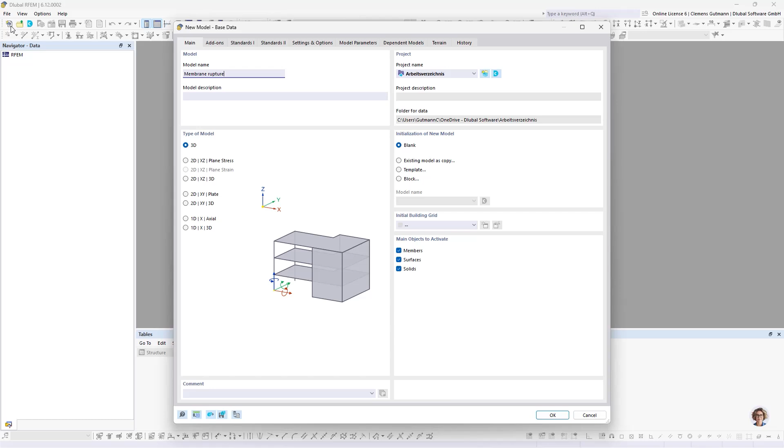Okay, so let's jump into RFEM and create a new model for the first case. I'm going to call that membrane rupture. For this I don't need solids, but I need the construction stages add-on because we are looking at different states of the model, as well as the form finding add-on for the initial form finding.

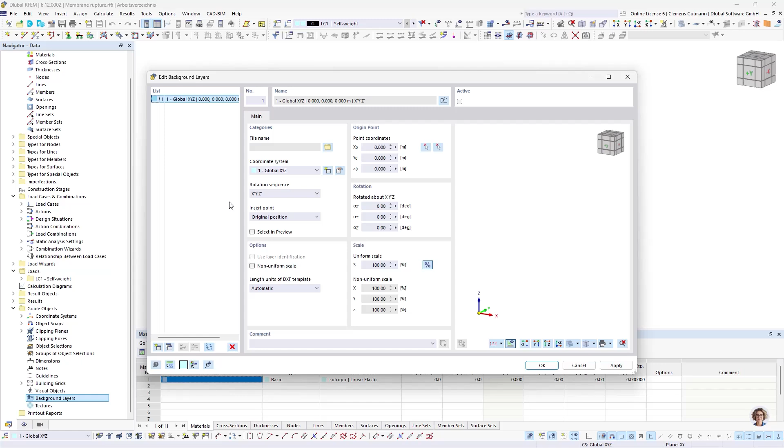I have the base geometry in a DXF file, so I'm going to import this into my model. This membrane structure is located between two buildings. We can see the surrounding walls on the left and on the right, and in between there's a road, something like that, and this membrane is covering that space.

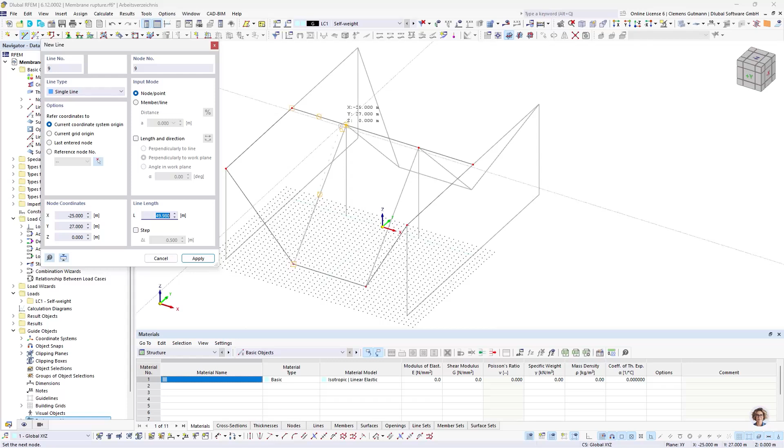Okay, so let's start with creating the lines, and then surfaces. For this project I'm using a PES-PVC type 3 fabric. Our stiffness type is, of course, membrane. Then we can select the boundary lines, and the other surfaces will be of type quadrangle.

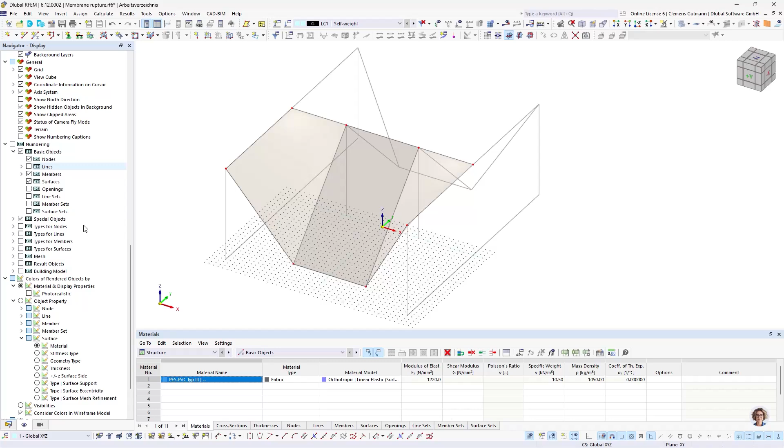It's always good to inspect the orientation of the surfaces. This can be easily achieved by going to the display navigator and scrolling down to the section for colors of rendered objects, where you can choose the surface side being displayed - one side is blue, the other one is red. I want them to be oriented in the same way, which I can do by right-clicking on that surface and reversing the local axis system.

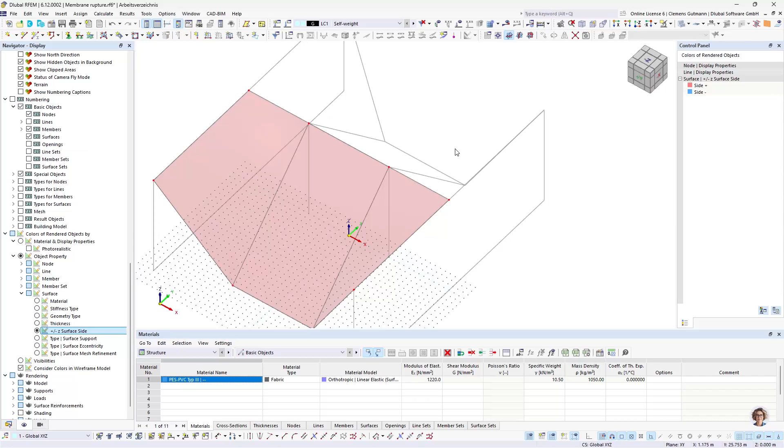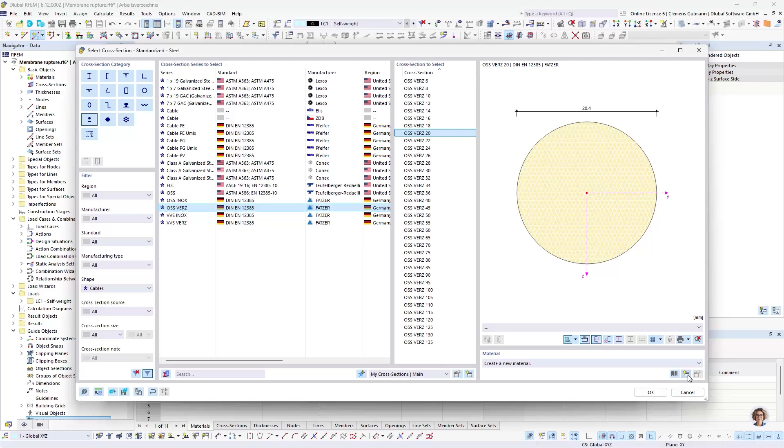Next thing we're going to model are the cables. So we have some cables here in this model, and for this I'm going to use a material from a German company, and I need a new material from the same company.

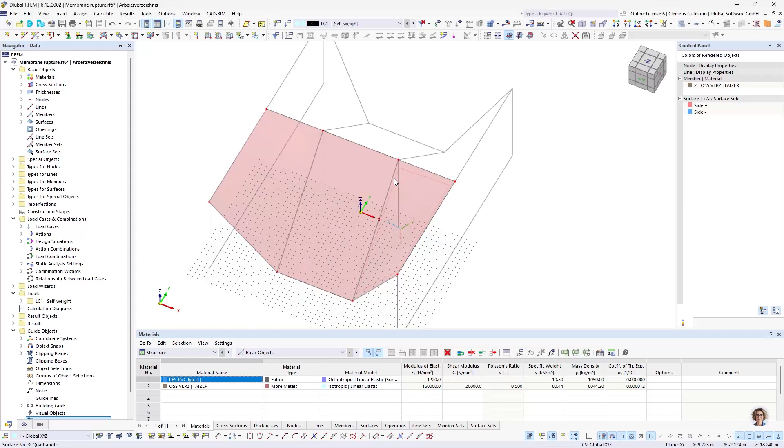So one of the cables will be here, and the other one's here. Good, so that's the cables, and then we have some pylons, and these pylons are made of a hollow cross-section.

Here. This one. And then we need a new material for them. Okay.

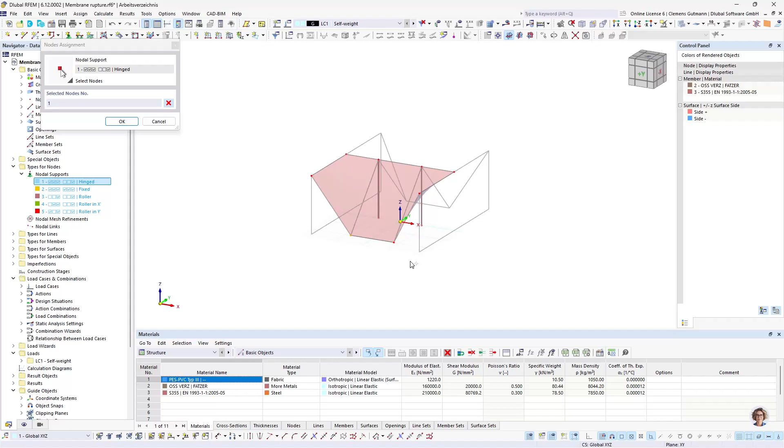Then we can proceed with the nodal supports. So we have two on each side, and the ends of the cables will be supported like this, here and here. And then we have fixed support for the pylons.

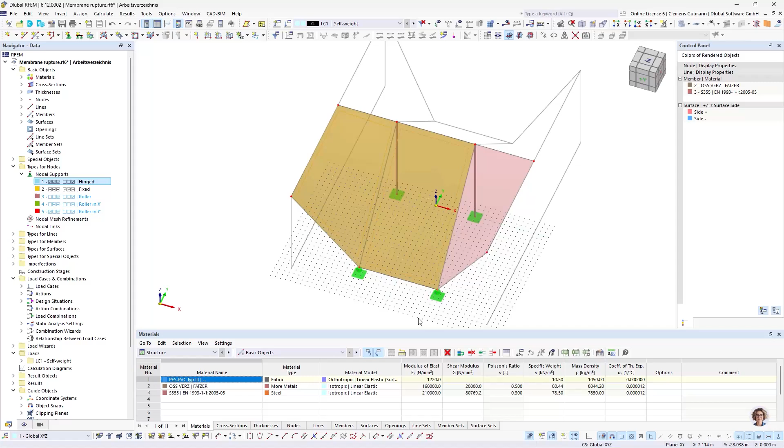Okay, that looks good. And then, of course, we're going to copy this to the other side. Copy. Okay, oh, forgot. Copy. Yeah.

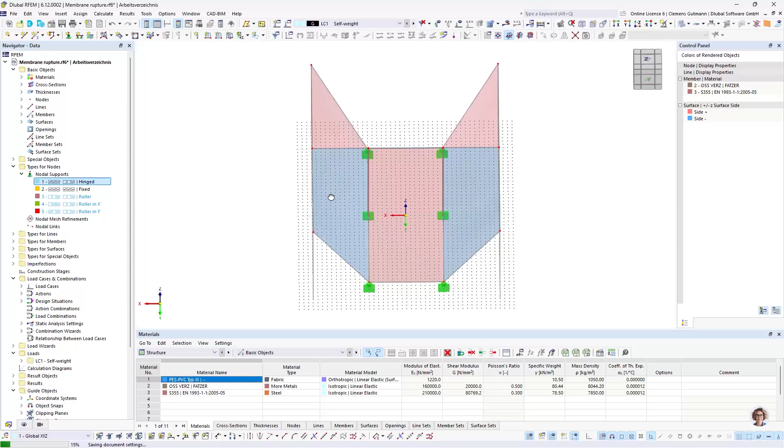All right. Then we have two more. We have to flip the local axis system. And then, last but not least, we have some line supports at the top of the walls. All right. Here. Here. Okay.

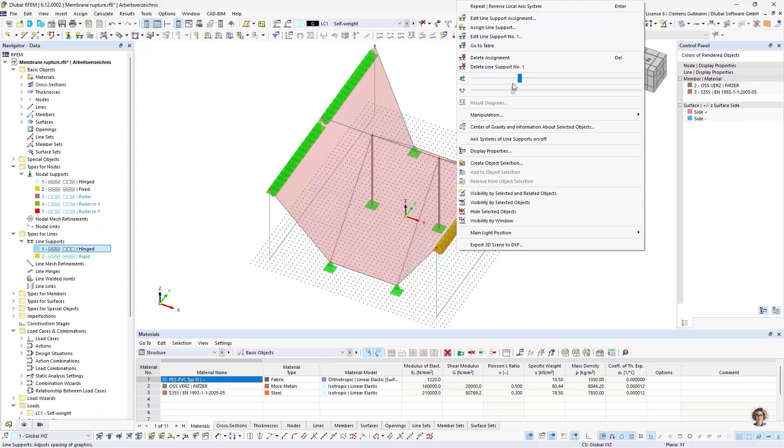Then let's take a look at the different stages that we're going to analyze. For this, we're going to the construction stages section. There we have, the construction stages have two parts: one part is about the topology, the geometry, the objects, and the second part is about the loads.

So here in this first step, we're going to take a look at the topology and the objects, and we have a start, and this will be the form finding. Then we have a second one, this will be the membrane rupture, and the third one, where we are going to look at applying securing measurements, and the last part will be removing membrane panel. So yeah, we have these 4 stages.

Of course, you can have a lot more stages. You can have whatever combination you like. You can have different variants. So you can choose for any stage which is the previous stage. So if you want to analyze different variants, you can have one start and then different variants, or you can have two or three starts. You're completely flexible with this add-on. It's very versatile what you can do with it.

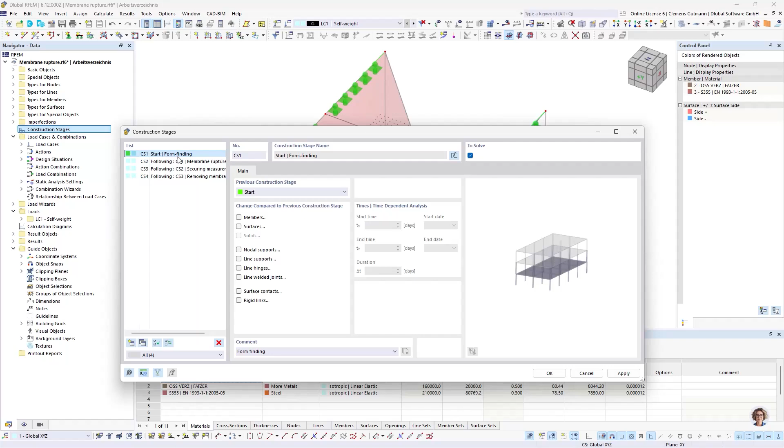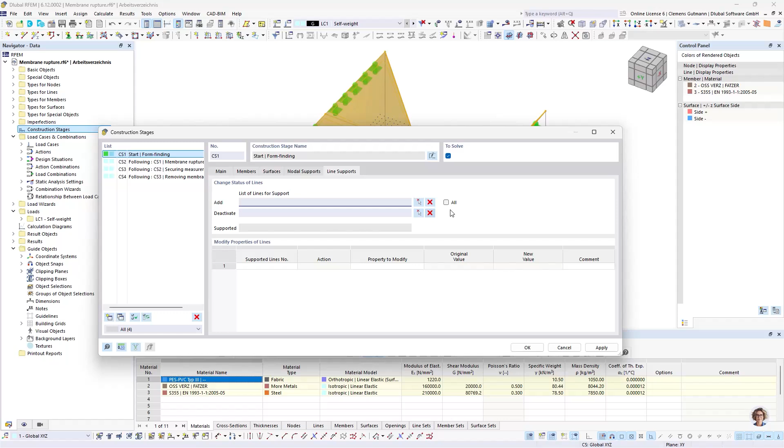So let's talk about which elements we are going to have. So in the start, in the beginning, we're going to have all of the members, and then we're also having all of the surfaces, as well as all of the nodal supports and all of the line supports. So this is our first stage.

Then it comes to the membrane rupture. Then, of course, we didn't model it. So how are we going to do this? There are, of course, several approaches, depending on your model, which geometry you have, to think about how you can represent this. I'm going to do it in one way, but of course, you can think of a different way depending on your needs.

One important thing to notice here is that currently it is not possible to interact with the form found shape if the form found shape is created within RFEM. So you do the form finding and you have a mesh that is used for that, for the calculation. And then you get a result. And you cannot interact with this result and, for example, say, okay, I want to rip that calculation mesh open.

So you have to do this beforehand. In our case, I'm going to do this by creating a small intermediate surface that will be there for the form finding, but then removed in the subsequent construction stage.

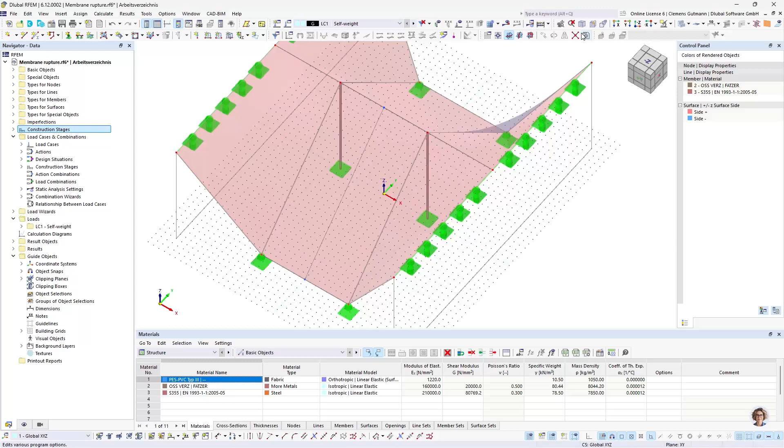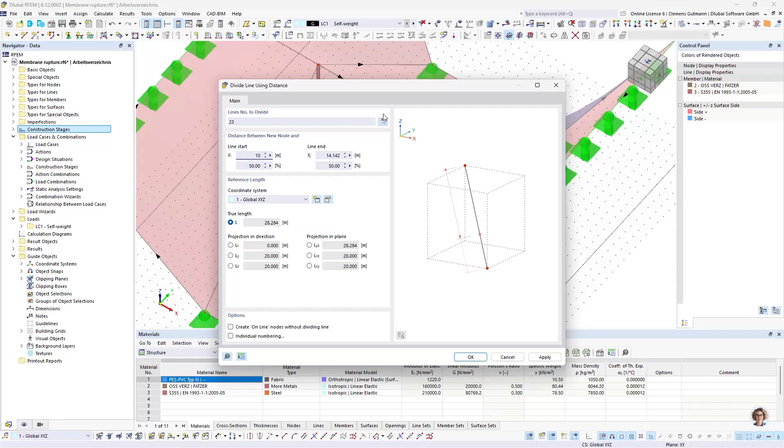So I'm going to draw a line here, and I'm going to connect this line so I get a proper connection here, and this bottom and top line is divided. And then in our case, our panels will be 10 meters long. So what I am doing is I'm going to divide that line at a certain distance, in our case 10 meters from the start. Apply, and then again 5 meters in the middle of that line again. I'm going to move this node by a little bit, let's say 1 centimeter.

And then mirror this about the YZ axis. And now we have this little space here.

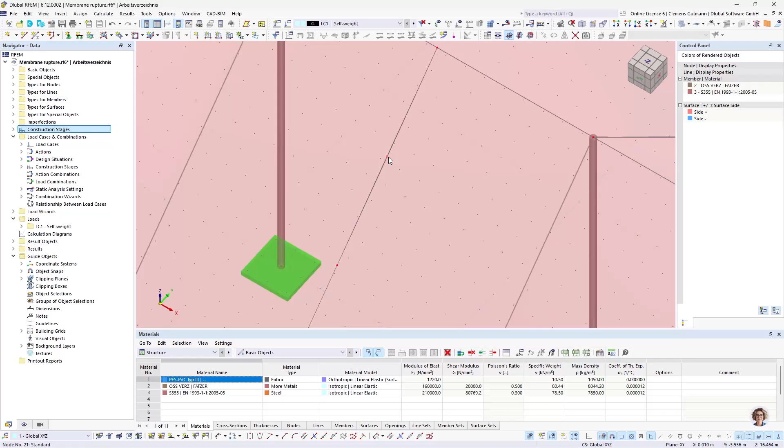I'm going to divide the surface, with intersecting lines, all intersecting lines. This creates 3 surfaces, 2 big ones, and then this very small one that will be covering the rupture in the beginning. Then, for the later analysis, I also want to remove the top panel that is broken, so I am dividing the surface again.

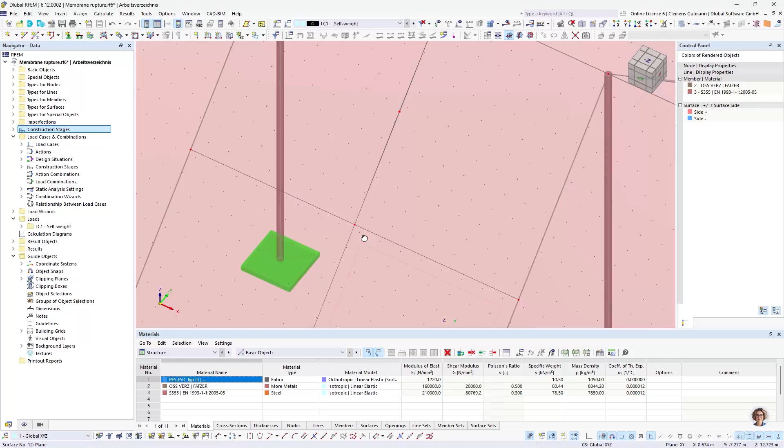Good. Next thing is we are looking at a very delicate analysis here. It's very complicated because we have a very sharp rupture. Maybe again this as a background.

So why is this rupture defined as 10 meters long? Of course this length will change during the form finding, but this is something we have to do like this. You can work around that if you do the form finding not in this model, but import a form-found structure. Then you can work with that structure, but in our case we have to make assumptions for the length beforehand, before the form finding.

And what we don't see is how the panels are actually placed on this membrane. For this project, I imagine that there is a weld here at this line and also at this line, and the weld has roughly double the thickness of the membrane, and therefore is a lot stiffer. It's not very likely that the weld itself will rip. So we assume that this rupture, which is a dynamic process, will stop at the weld and maybe run along the weld, but it won't cross it. This is an assumption that I make here.

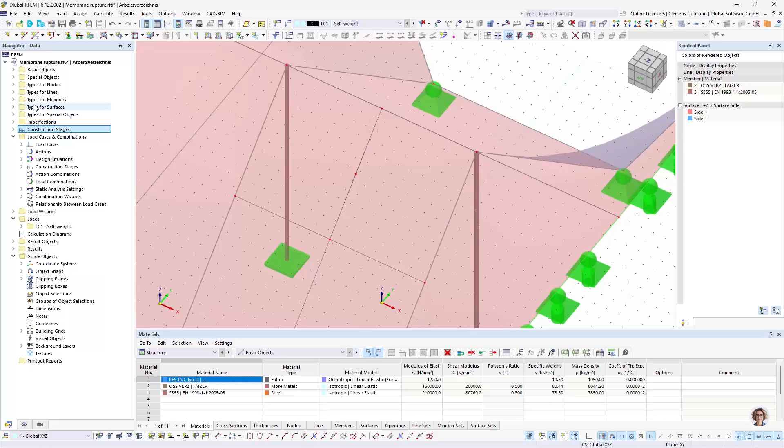So nonetheless, we need some mesh refinement here, and I'm going to apply a mesh refinement of 5 centimeters to these lines.

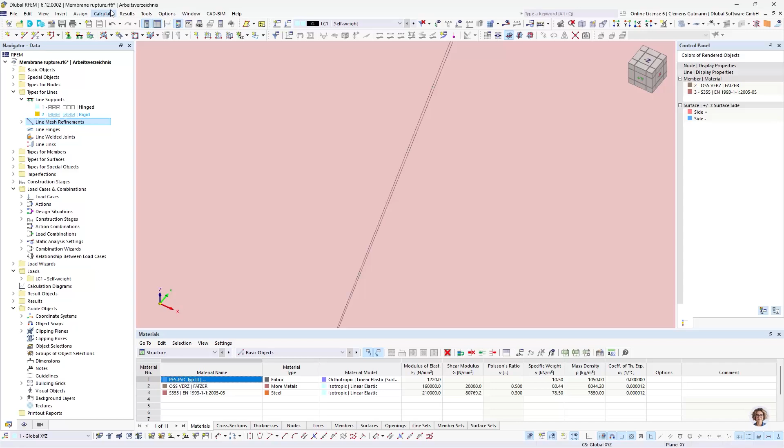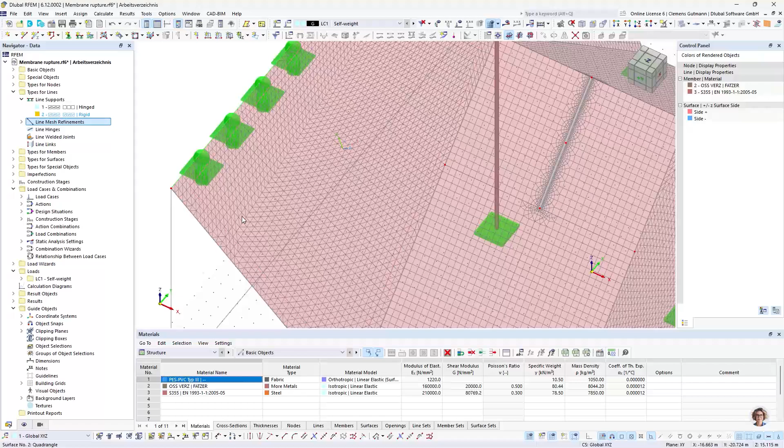Okay, and then we're going to have the issue that this is very, very small in the beginning, and by default the meshes of membranes are triangles, also for plane surfaces. I'm going to deactivate this to help improve the mesh in this case. We can see for the quadrangle surfaces they are automatically turned into triangles because it is a curved geometry from the start.

Okay, let's proceed with the loading. So the first load will be the form finding loads. I'm going to deactivate the self-weight for this analysis.

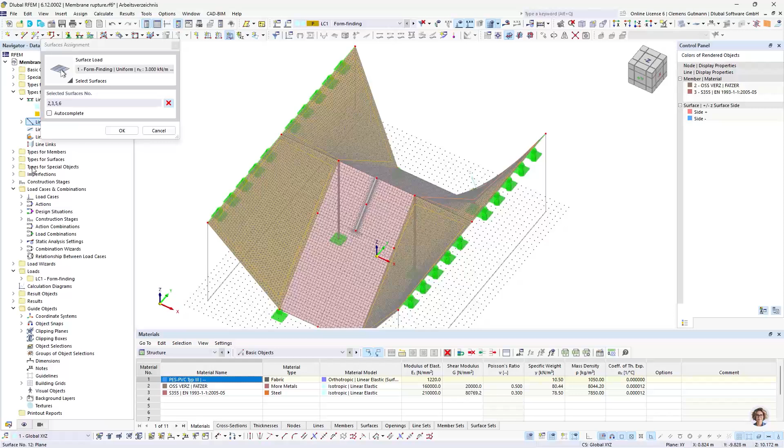Then we have the surface loads of type form finding, and I'm going to use a ratio of 3 to 2 for the outer areas, and then 3 to 1 for the middle one.

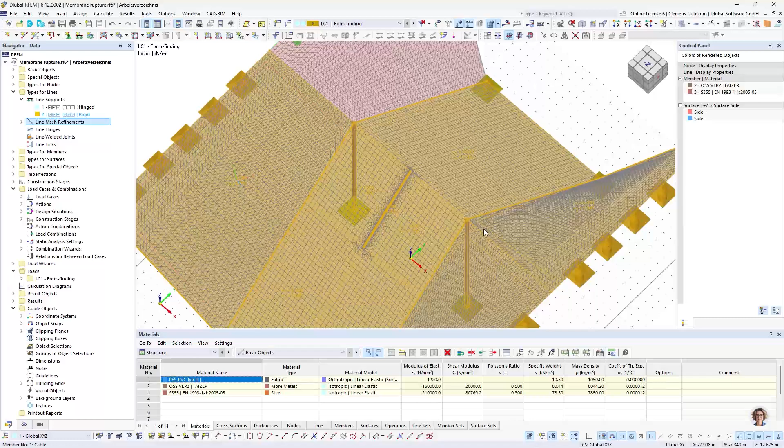So one thing we didn't take a look at yet is how the local axis systems are oriented, and I want all of them being oriented the same way. So I'm selecting all of them, go into surfaces, edit, and go to input axis, axis parallel to lines, and I want to have the weft direction parallel to this top line here.

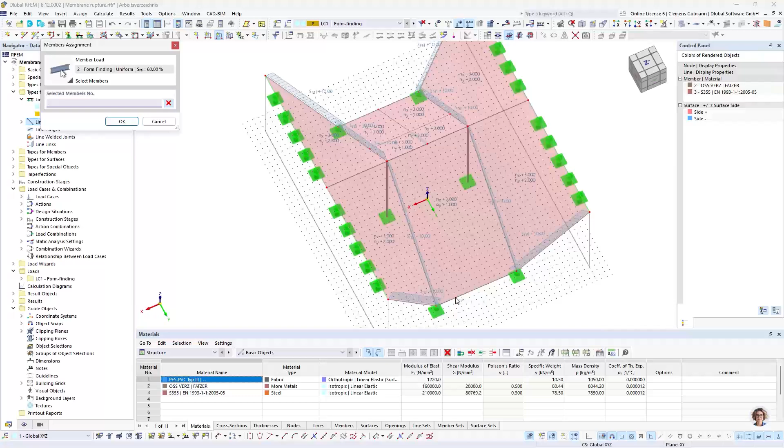Good. Then the last thing missing are the cables, and then I have these. With a sag definition of 10% of the length, apply. Then for these arches, I want a little bit more, 60%. Oh, I forgot to model them. Apparently. Cable.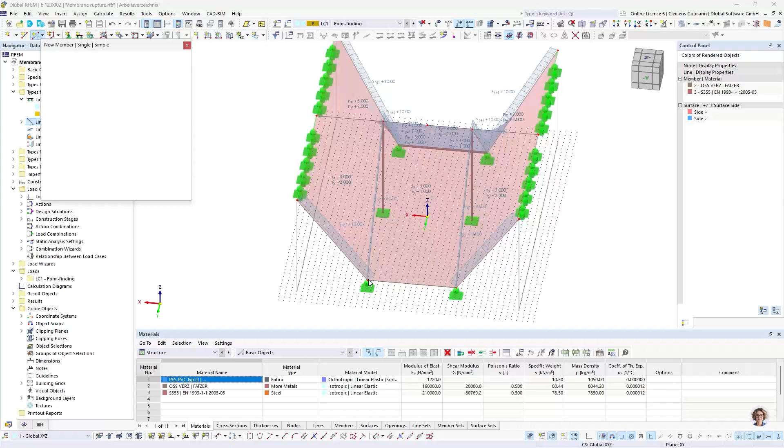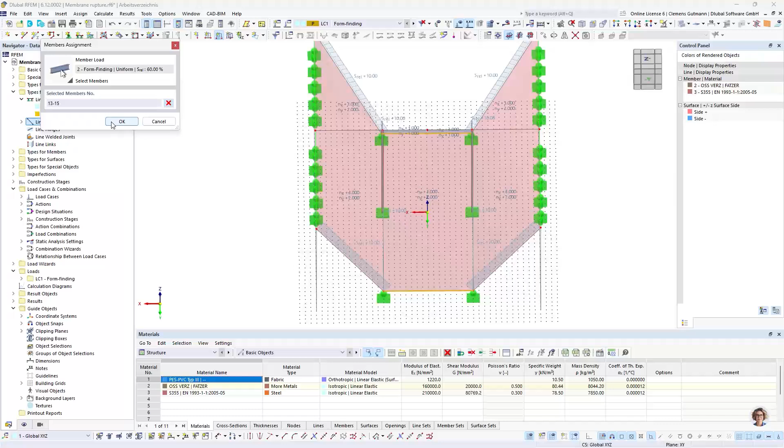Cross section. Okay, it's 60% for them.

So yeah, let's have a look at the first stage. One thing we have to do now is to also provide how the load cases interact with the construction stages. I'm going to jump into the second part of the construction stages definition, and here we can assign the load cases. In the form finding stage, we of course have the form finding load case, and then we can calculate this.

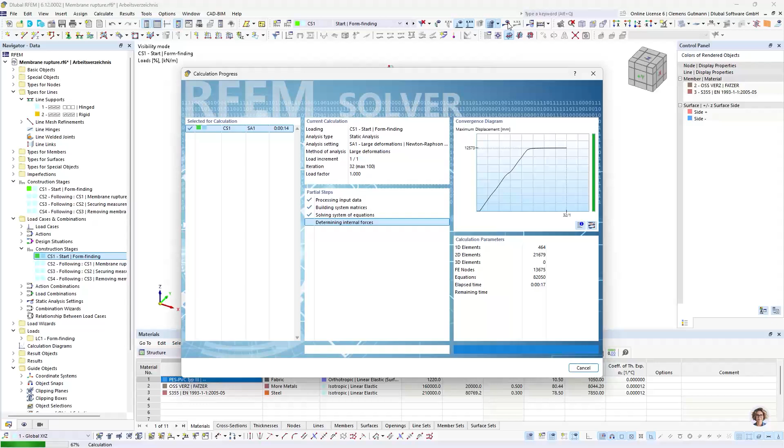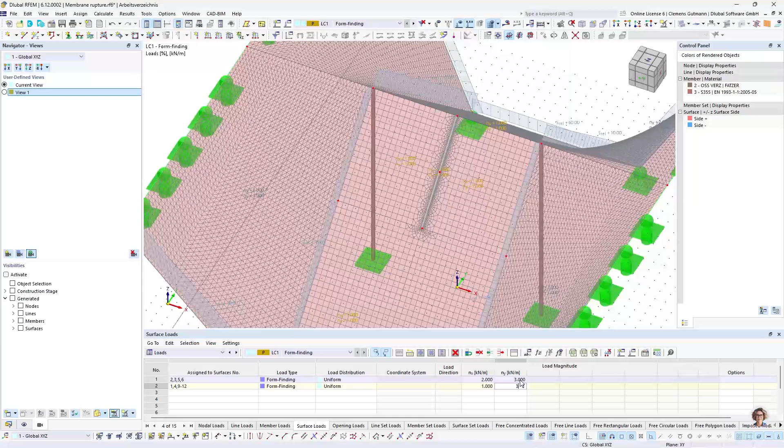Okay, let's take a look at the scaling to 1. And I see I made a small mistake, I swapped the values by accident. Let's quickly correct that and try again.

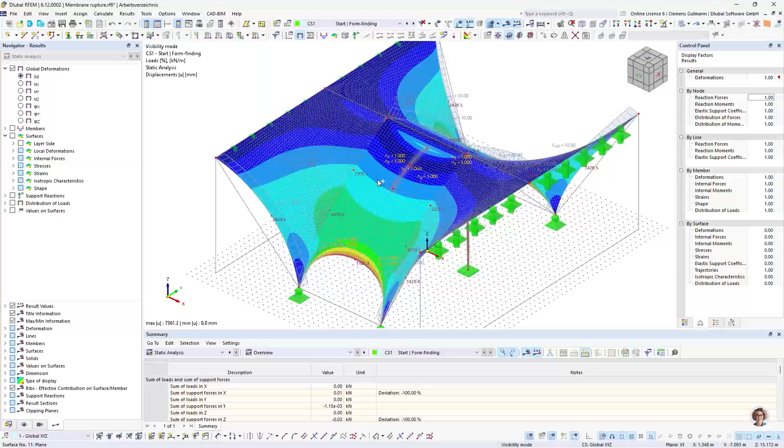That's better now. Okay, so then we have the second stage. Now let's take a look at the third stage that we need.

Here we want to take some securing measurements. So in reality, you'd have some sort of cable that would span across the top of the pylons or between these cables.

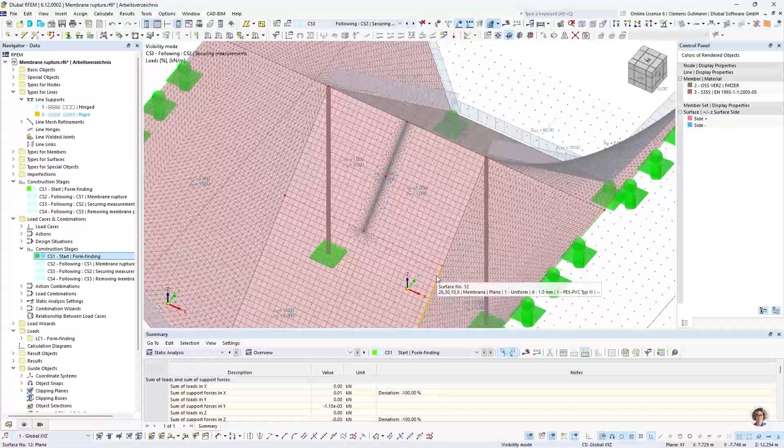The issue with modeling this with a cable that comes into play at a later stage is that it's currently not possible to have large deformations between stages if an object is to be activated later on. Due to the form finding, the initial points will move, for example the pylons and the cables. So the cable we model at the beginning and want to activate in a later stage won't connect to the rest of the structure.

This is something we have planned to improve for the future, but we can do this in a different manner. In our case, I'm going to use nodal supports, and I want to support the edges of this panel. So I'm going to create a new type of support, and activate this for the global X direction.

Here we could, of course, have a fixed support in the global direction, but this would mean that we are not taking into account the actual stiffness of the cable we want to use. We can do this by simulating or by calculating this.

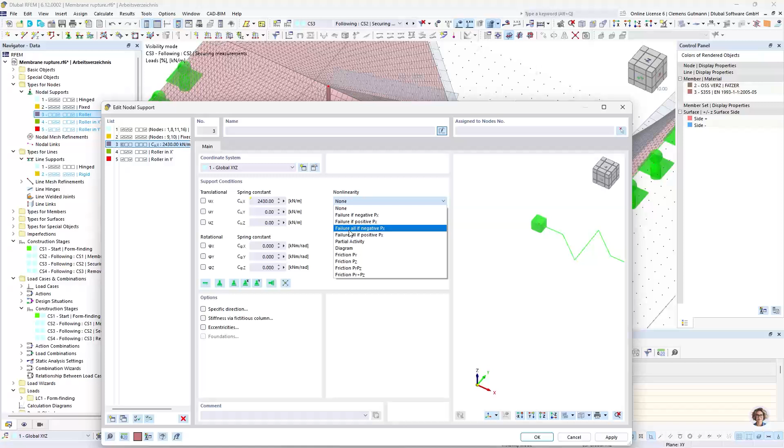So 16 meters is the distance between the top of the pylons. Of course, we could go into more detail and do this as a diagram, taking into account different changes if the cable is longer or shorter. But I'm going to use this as the initial value. Of course, we have nonlinearity, so the cable is only active in one direction.

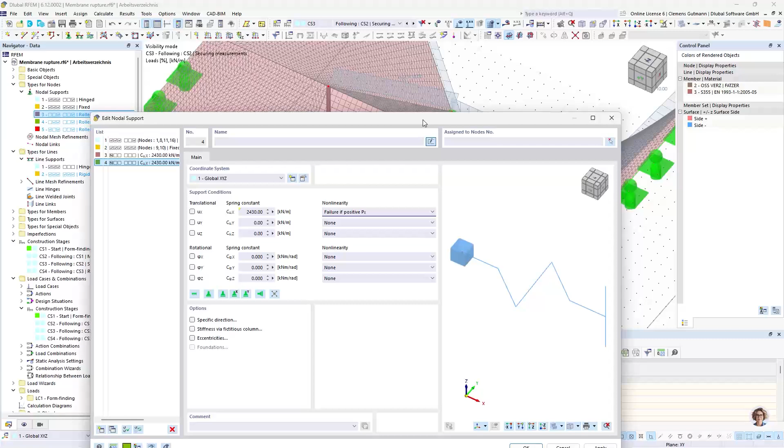And then I'm going to delete them and copy that one. And now we have to assign them. So I always memorize how the nonlinearities work like this.

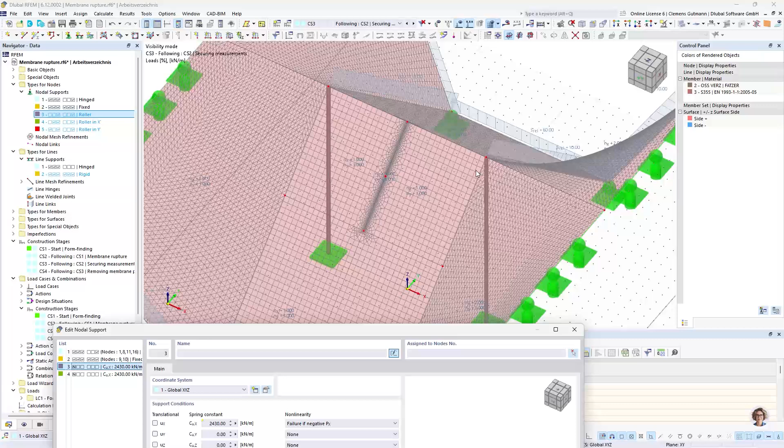If you have a failure in negative X direction, that means this point, this node, can move in this direction. So in our case, the right side can move in the negative direction. So this is the right support for these two nodes.

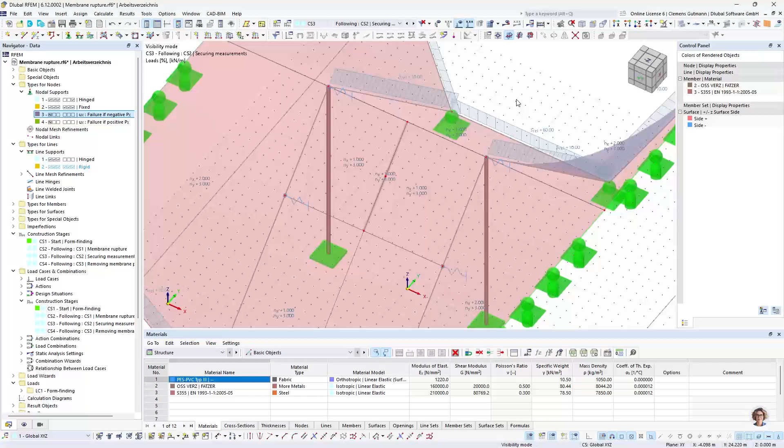And for the other side, we have the other one. Good. Then everything is set up for finalizing the construction stages.

Of course, we could now take a look at what happens also in the last, or maybe in the third and fourth step. So the third is the securing stage, and then we have the removement stage. So when this stage is happening, there will be people on that roof.

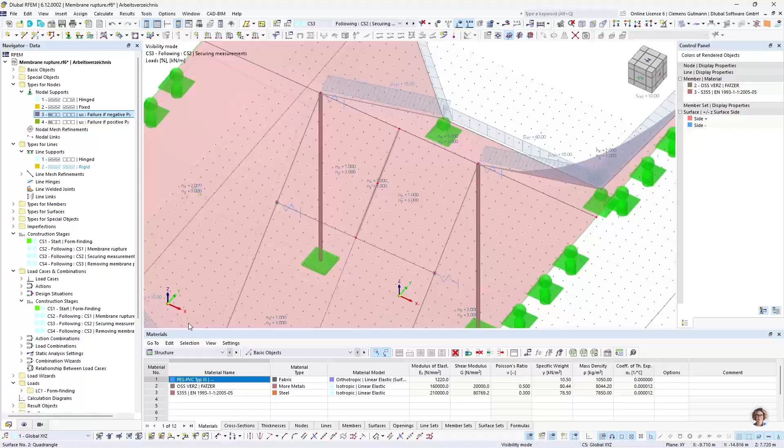So we could now add a load case, for example. Go to load cases, and could have some - let's take them as accidental actions. Let's have some, yeah, construction workers.

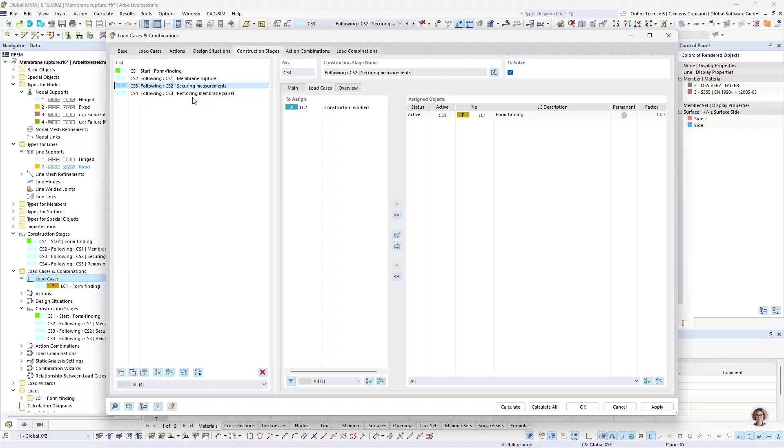And well, this could then be fed into the combination. So in the construction stages, we have the form finding, then we have the rupture, so there are no additional loads. But here in these two stages, we could add these construction workers.

So we can take a look if it is possible that people can walk on that membrane without breaking anything. Of course, they will be hooked up to something, but nonetheless, we don't want to break the membrane any further. So this is how this could be achieved.

Of course, we need the according design situation for this. So in this case, we'll have a new design situation of type accidental - well, the second one actually. And then we have our combination wizard.

So when using the construction stages, it is very easy to do the combinations when using the combination wizard. How is this done? By default, you all know the combination wizard, but this combination wizard can also take into account the construction stages as an initial state.

So how is this done? We want to have an analysis or combinatorics for all these construction stages. So we bring it on the right side and then take a look how the combinations are carried out.

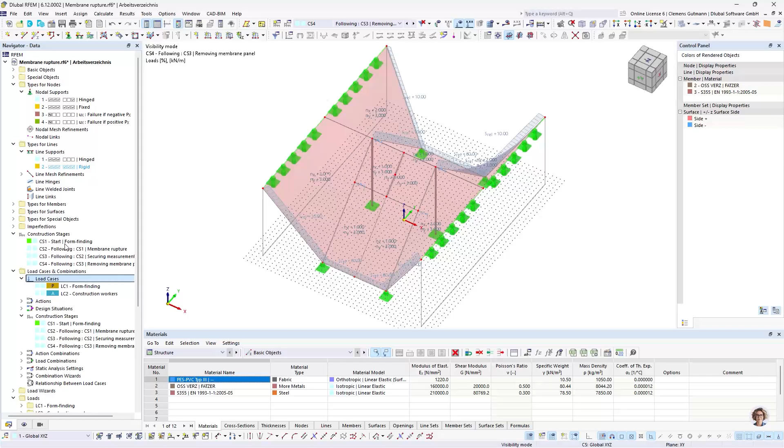So one last thing, we now have to redo the construction stages. We have all the members and all the surfaces, but we don't have all the nodal supports. So we only have the first 6 nodal supports in the beginning.

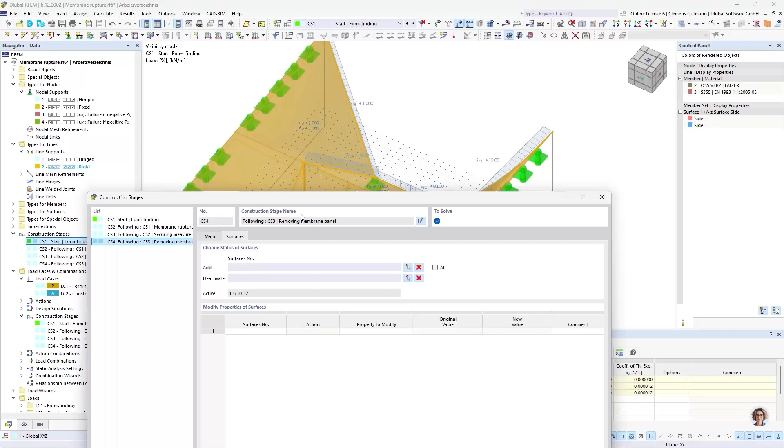Then we have the membrane rupture. Here we want to deactivate one surface, the small one here. Then we have the securing measurements coming in, and these are the 4 additional nodes. And then we want to remove some more of the membrane, deactivate them.

And now it's done, so let's take a look. In the beginning we have all of the objects, then the surface here is removed, then the nodal supports appear, and then this membrane is removed.

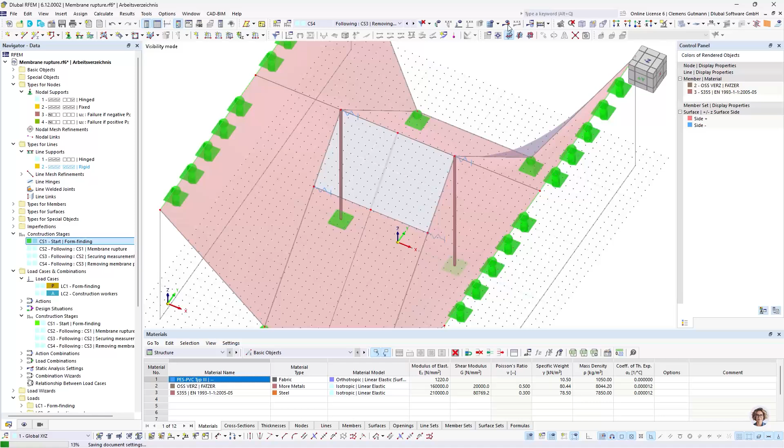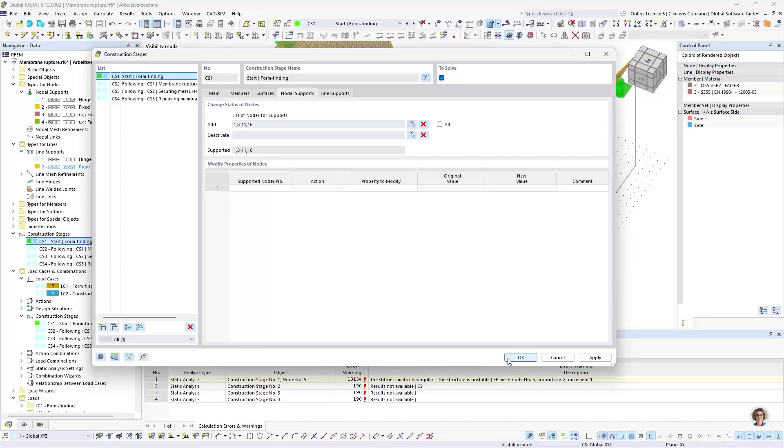If I'm now going to calculate this last construction stage, we can see that it will automatically detect which construction stages are happening before that stage, and it calculates all the sequence. Oh, and I seem to have forgotten one of the nodal supports, so let's quickly add that one. Try again.

So construction stages, if you calculate them directly, are basically sort of a load combination which calculates all the load cases that are assigned to that construction stage. But of course, you can also use the load combinations instead.

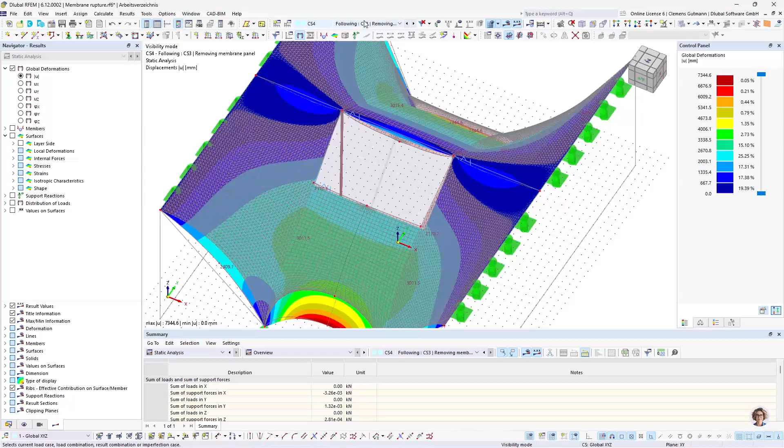Okay, so let's take a look at the results. In the beginning we have the form finding, then we have the rupture of the membrane. There you can see that if we take a look at the stresses, we have this peak like we would have expected.

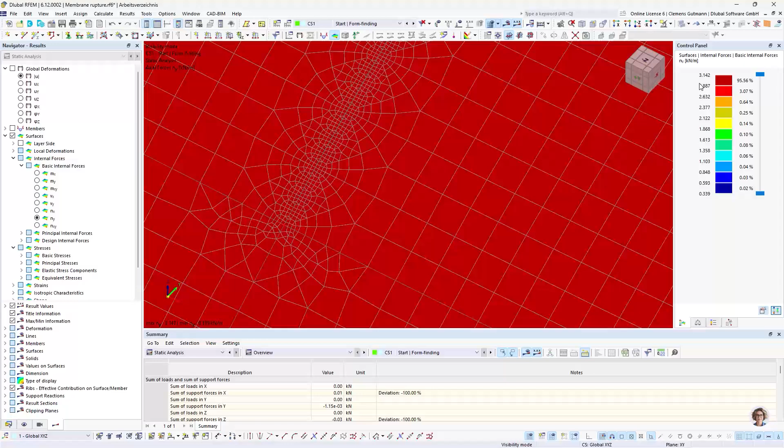We can see that this peak is about 40 kilonewtons per meter. And if we take a look at the same spot in the beginning, we have like 3. So yeah, you can see that it's quite a large stress.

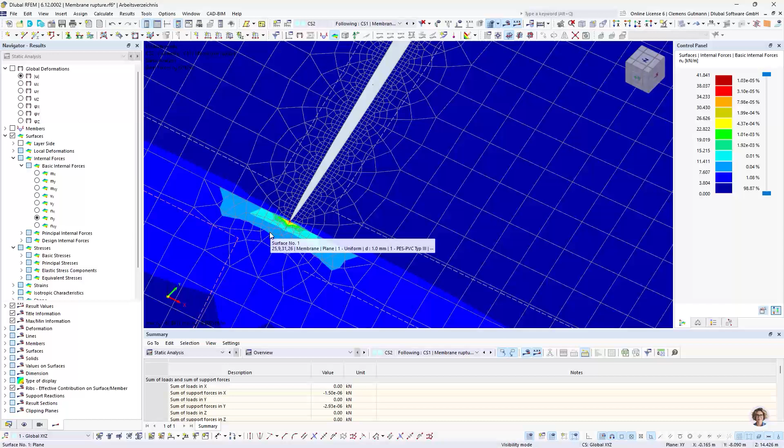And now we can continue and do some design for that and check if the weld at that place can bear that load. Of course, it's also important to check the mesh in this region, to do a convergence study, for example, to make sure to capture the physics in that spot correctly.

The next stage is then implementing these security measurements, and then you have the removal of the panel. So yeah, this is one approach, there may be different ones. You can also play around with how you want to proceed. Maybe you don't want to change one panel but have to replace the whole membrane, and then you can check out different sequences, how to proceed, and so on. So yeah, you have great possibilities doing that in RFEM.

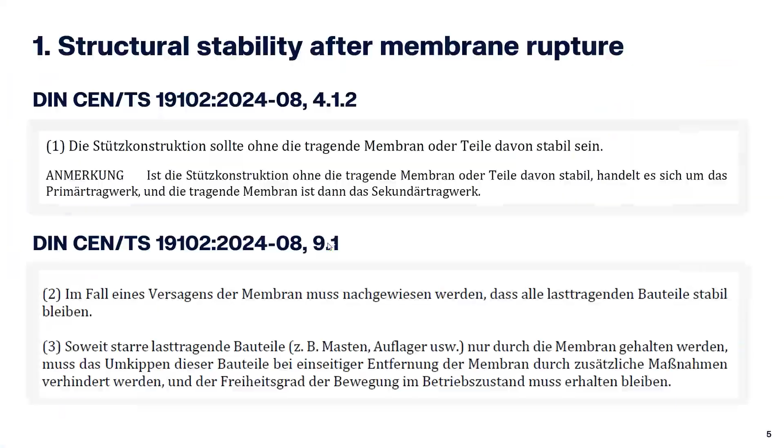Okay, so that's all of the first model. Let's go back to the presentation and jump to the second one, the foil cushion. So here again, some parts of the code for the foil cushions.

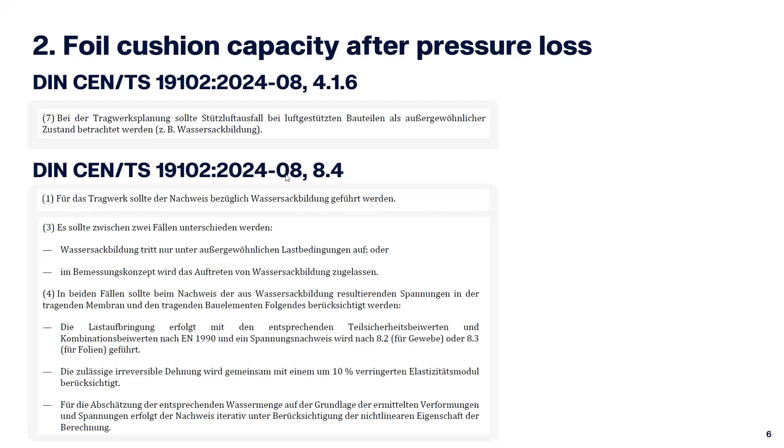And let's jump back into the program and make ourselves a new model. Foil cushion, pressure loss. Here I need again the construction stages add-on and the form finding add-on. In this case, I'm only going to model one cushion, but of course this type of analysis can be carried out in a model with the whole global structure as well.

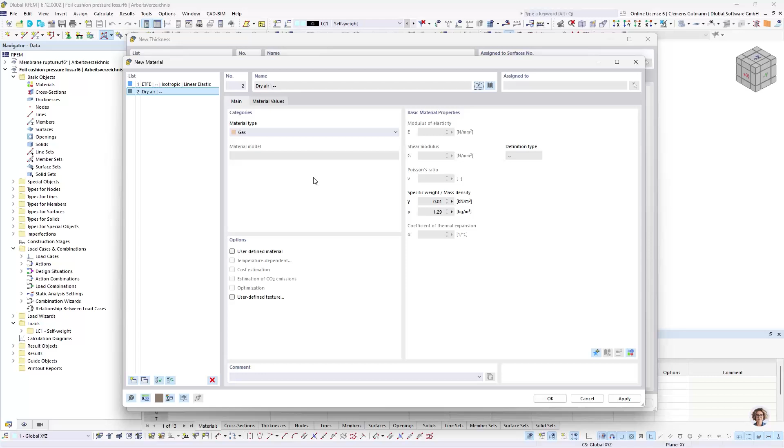So let's get a simple geometry first. I'm going to use an ETFE foil, and I'm also creating dry air for the gas later. The ETFE foil is going to have a thickness of 0.2 millimeters, and it will be a quadrangle surface.

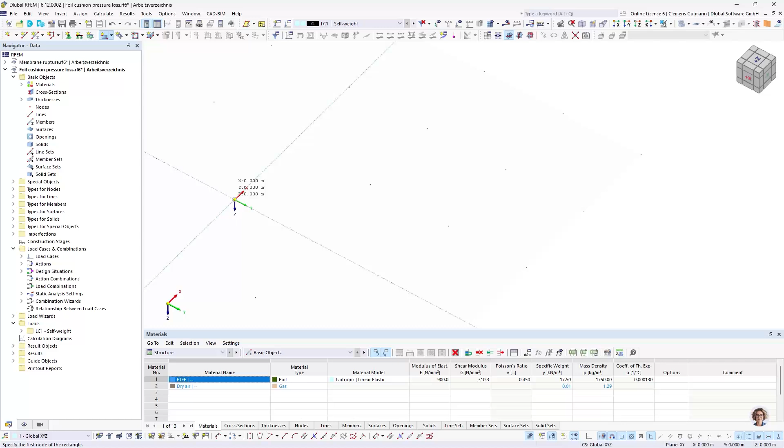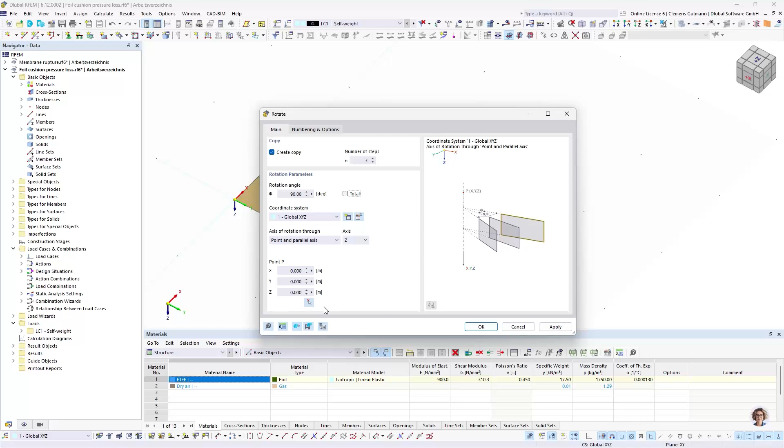Okay, wrong button. Let's change that to a quadrangle surface and move that node down by 10 centimeters. Then rotate that about the center. And flip that again over to the top.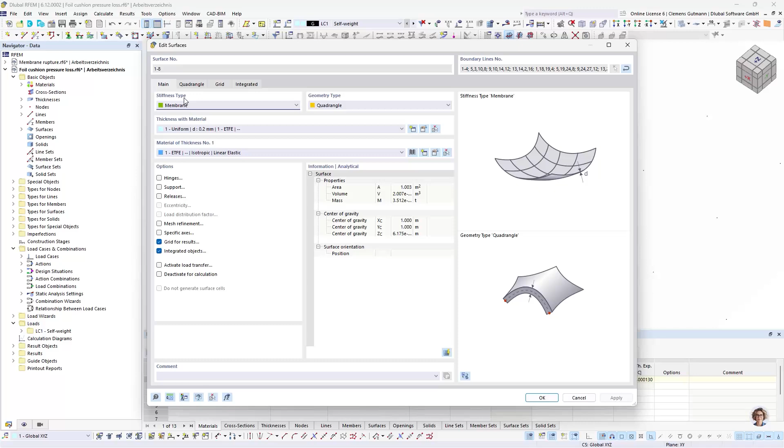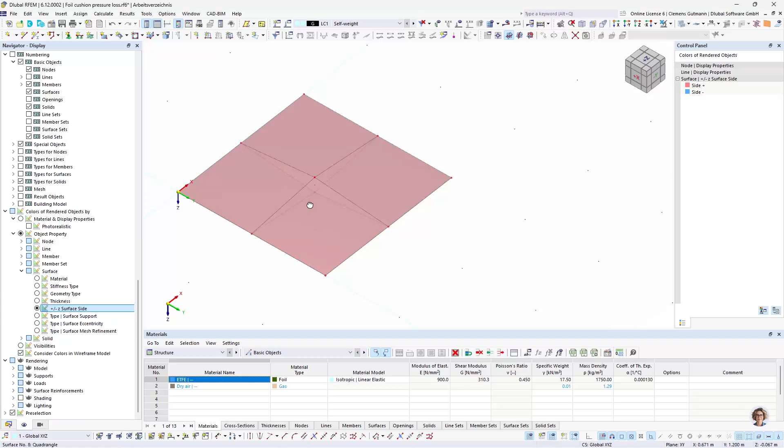Okay, let's quickly take care of the local axis systems so they match. Input axis, and again make sure that they're oriented correctly, so they're all facing one direction. It's good, but maybe let's flip them downwards. Sorry, wrong button.

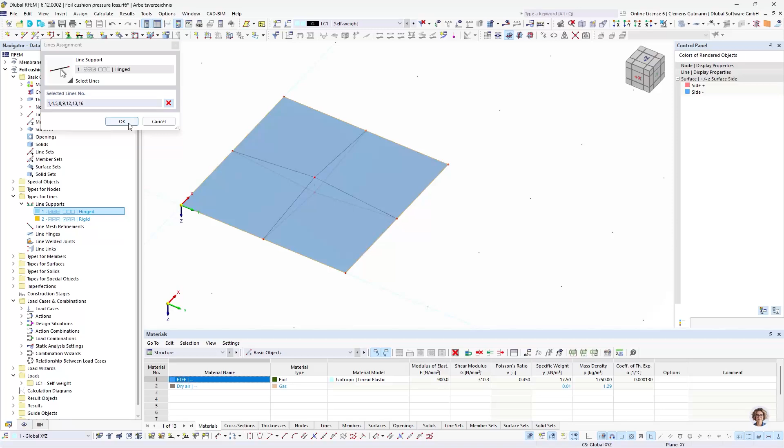Okay, good. Then we need some line supports and our gas volume. And for this gas volume, we need an initial condition. Okay, that looks good. We then can proceed with the loads.

For the form finding, and then we have, of course, our permanent load, so the self-weight, and last but not least, our ponding load. Okay.

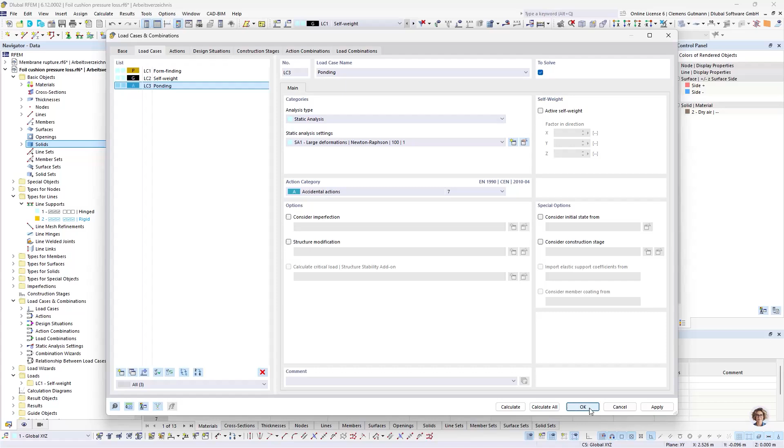As for the form finding, we're going to use 0.5 in each direction for all surfaces. And for the gas volume, an initial overpressure of 300 Pascal, for solid number 1.

Okay, did I check the self-weight? Okay. And for the ponding load, this will be also a surface load here for the surfaces 5 to 8.

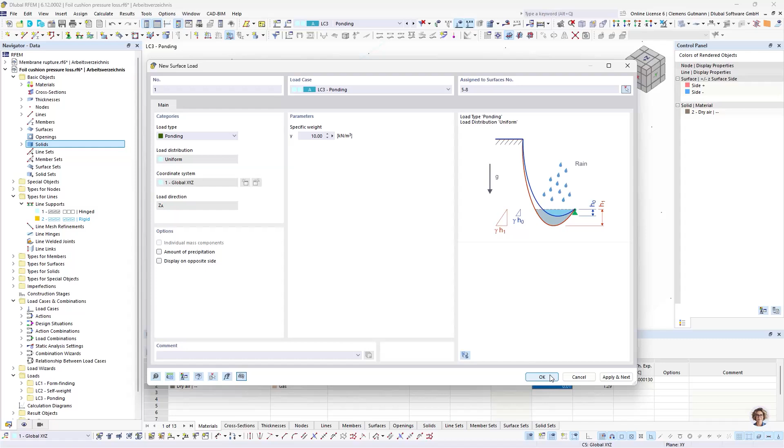Yeah, okay, good. Let's move on to the construction stages. We have the start with the form finding. Here we want to activate all surfaces as well as all solids and all line supports.

The next construction stage will be the ultimate limit state for the permanent and transient condition. Here nothing changes, so we have no changes.

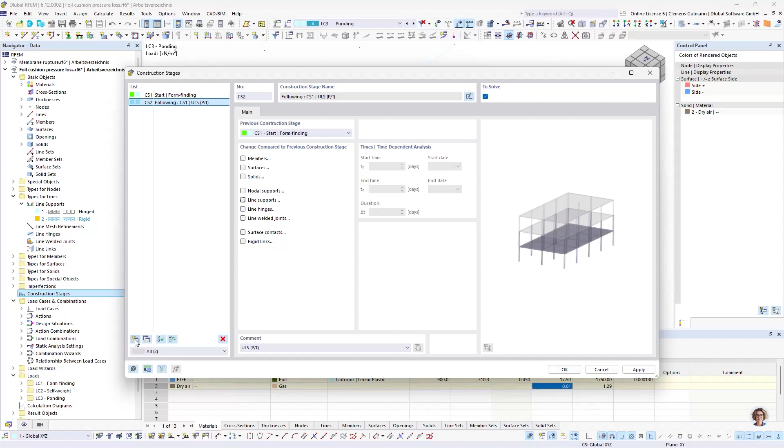And then we have a new one, will be the ultimate limit state for the accidental part, and here we are going to lose our solid or gas volume, as well as our surfaces 1 to 4. Okay.

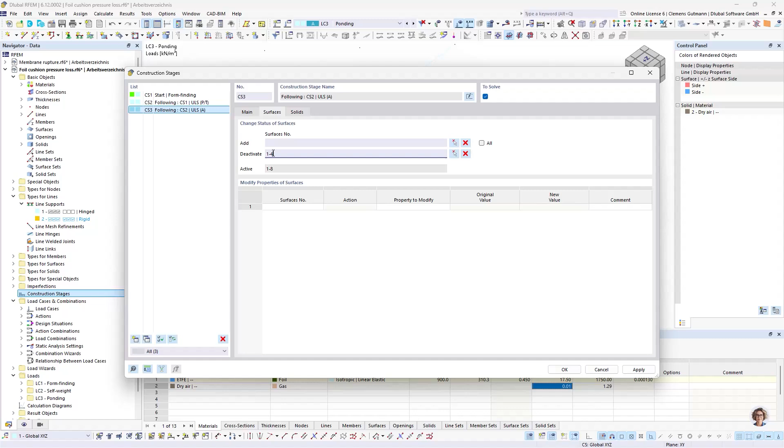Then let's go to the combinations. So here we have our design situation for the permanent transient, and then we have a new one also for the accidental loads, and for the ULS PT, we'll need the initial state for that, and this is for the other one, initial state here.

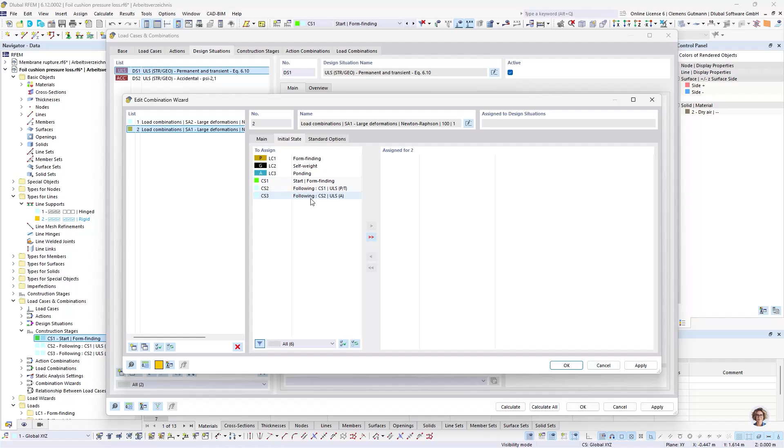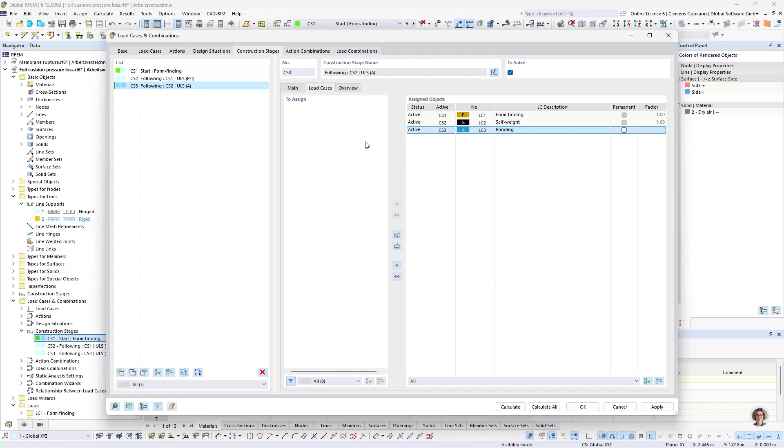And assign the combination wizard and take a look at the combinations. Okay, we forgot the load cases, so form finding is in the first stage, self-weight in the second, and ponding in the third. Of course, if I'd have more action categories, I'd assign them accordingly, but in our case we're only taking a look at the ponding loads.

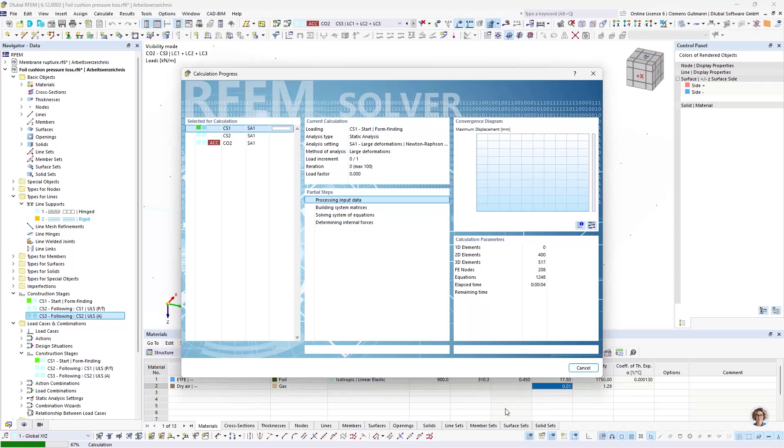And that's about it. So yeah, let's calculate that. Here the first two construction stages will be calculated first because they are needed for the last load case. And yeah, here we are. Now we have the ponding, and yeah, that is everything I wanted to show you today.